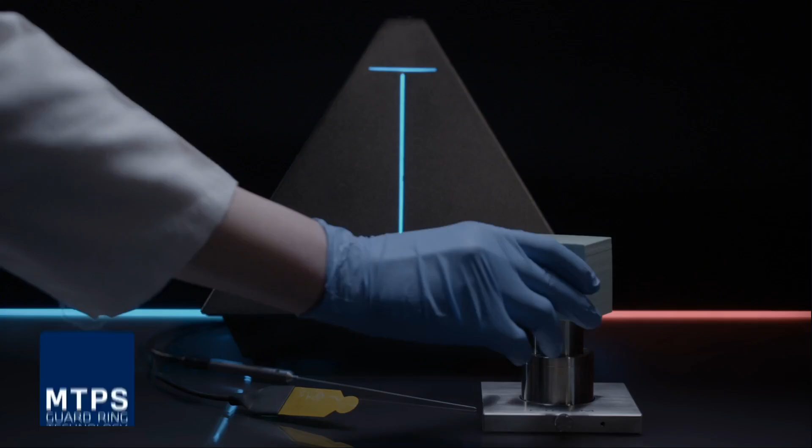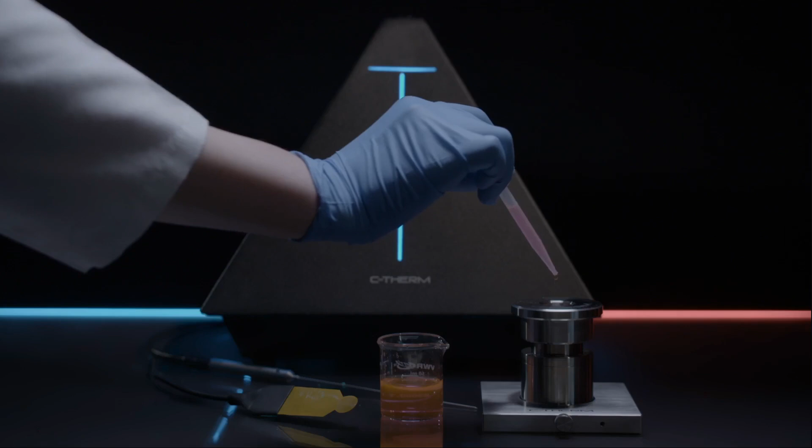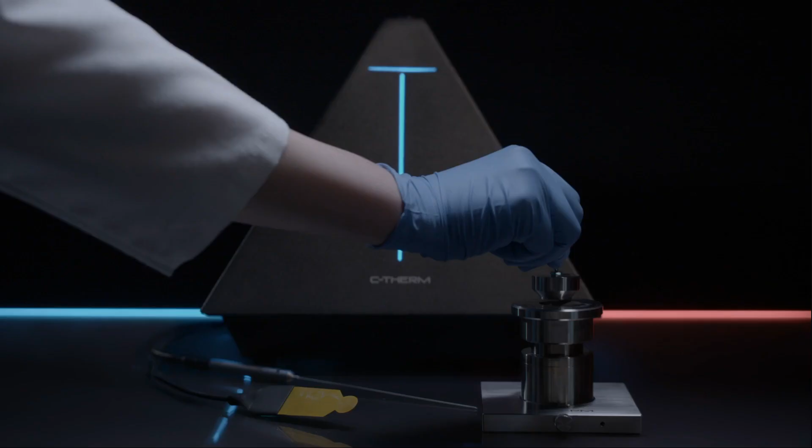The MTPS, Modified Transient Plane Source method, employs a single-sided sensor to directly measure the thermal conductivity and effusivity of materials. The method features the highest precision and sensitivity, providing accurate test results in seconds. It offers the maximum versatility for the non-destructive testing of solids, liquids, powders, and pastes. It is adaptable for high pressure, broad temperature ranges, and environmental conditions. No regression analysis is required. MTPS is the choice method for situations where reproducibility amongst multiple users matters.

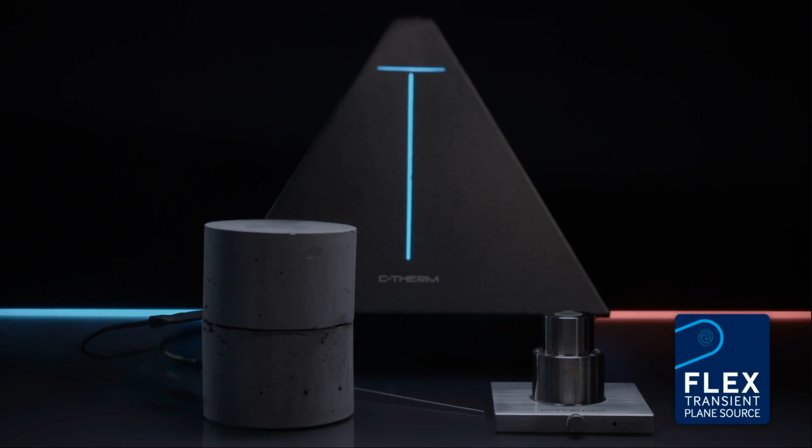With a double-sided sensor available in different sizes, the Flex TPS Transient Plane Source method provides researchers the greatest flexibility over experimental parameters, including timing and power. It is recommended for more experienced users with specialty slab, anisotropy, and thin film modules available. With no contact agent required, the hot disk-style TPS sensor is ideally suited for polymers, compacted geological samples, metals, concrete, and asphalt. Flex TPS is ideal for experienced researchers looking to push the boundaries in thermal conductivity.

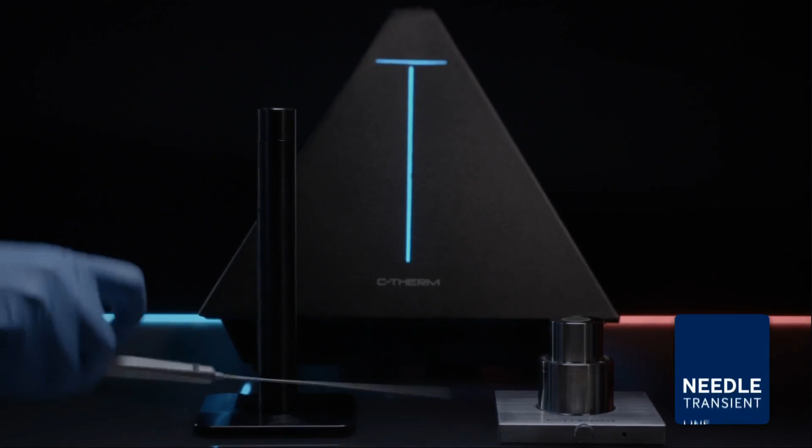Sheathed in stainless steel, the TLS, Transient Line Source Needle method, offers maximum robustness in thermal conductivity testing. TLS is best suited for granular materials, polymer melts, soils, slurries, and gels. C-Therm software provides full data acquisition and analysis in one user interface, allowing full control of all 3 methods. Intuitive, logical, easy.

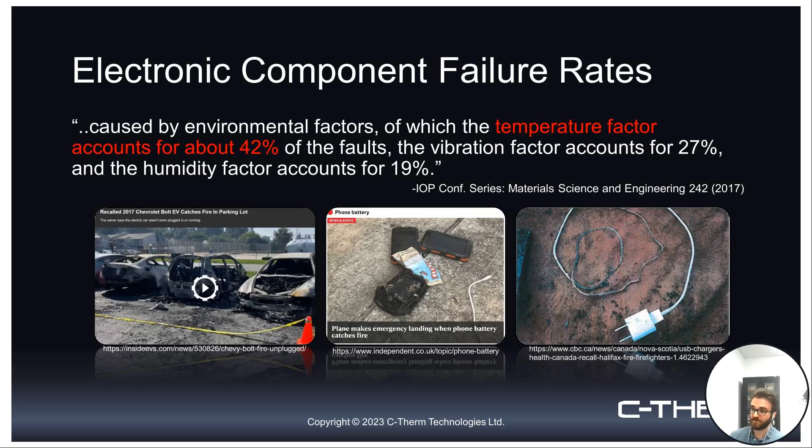A lot of the times when we're dealing with thermal management, it's related to the fact that what we want to avoid are these different component failures. A little excerpt I noted from a conference in 2017: temperature factors account for about 42% of all faults. So just shy of about half of all of these issues are coming from temperature-related components. So whether that's in an EV, in a battery, in a large-scale vehicle, smaller portable electronic devices, chargers, what have you, a lot of the times that temperature factor is a key issue that needs to be managed.

So this is all typically related to thermal runaway. Just looking to give a very high-level overview here, but thermal runaway is essentially a process that is accelerated by increased temperatures, in turn releasing thermal energy that further increases the system's temperature. And of course, if there's no way to properly dissipate or let that heat escape from the system, you get this form of an uncontrolled positive feedback loop.

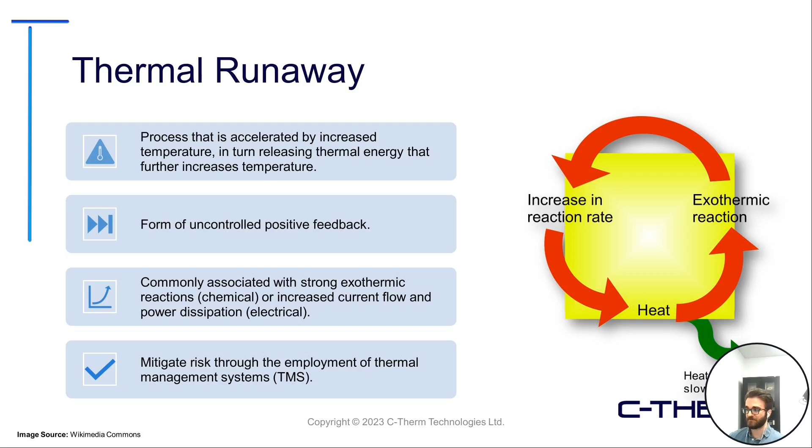When we're talking about electrical devices, these are typically noted to have increased current flow and power dissipation. And the way we mitigate these is through the use of thermal management systems. These can take various forms, how they are constructed, the different materials, what have you. But in all cases, their main goal is to help dissipate the heat from the component or from the system in question.

So today, what will be discussed is primarily around these potting compounds as a thermal management system. At a very high level, potting compounds provide not only structural and physical support to the electronic components, but from a thermal management side, they alleviate some of that temperature from these electrical components. This improves the efficiency of these devices during operation, improves the lifetime expectancy, and reduces breakdown and replacement requirements, which is all beneficial.

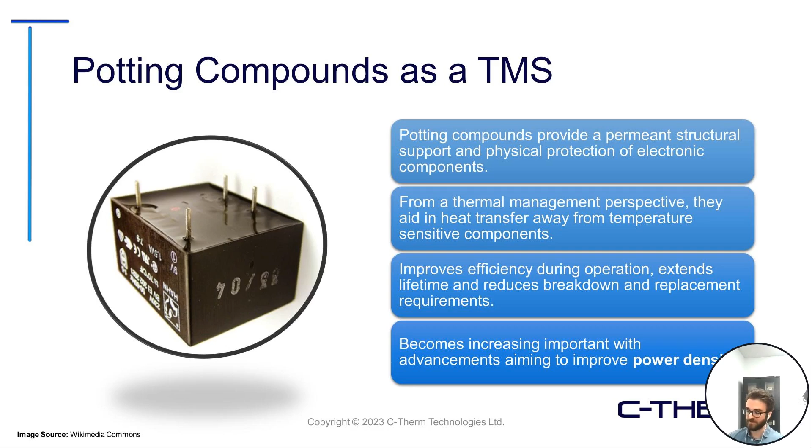And this becomes very important when the industry is looking to advance and improve things like power density in these devices, which will be touched on later in the session. But that's at the core as to why these systems are needed.

Again, just some background information on potting materials. There are different options out there. There's three of the big ones here with respect to material type, generally being epoxy, urethane, or silicone in nature. Each one of these is applicable to different scenarios. Epoxies are your hardest options. They have really good mechanical strength, offering that mid to high temperature range. Urethanes are a little bit of a balance between the two. They have good mechanical strength with some flexibility. These are typically used for your lower temperature applications, and sometimes used as a cost-effective alternative compared to some of the other available options out there.

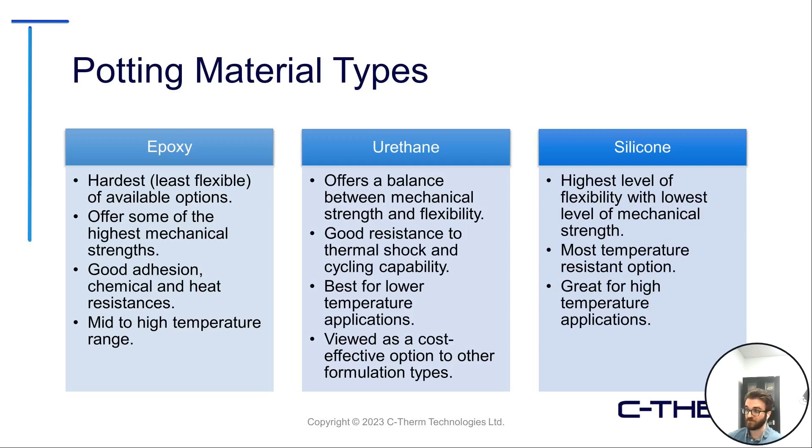And then lastly, silicone, and this one will be focused on more here today. These offer your highest level of flexibility, so really good at being able to get in and impregnate the different devices, flexible in nature, offering some of the most temperature resistance capabilities of the available options. So really great for those high temperature applications or where you're dealing with very high power output, resulting in high temperature conditions.

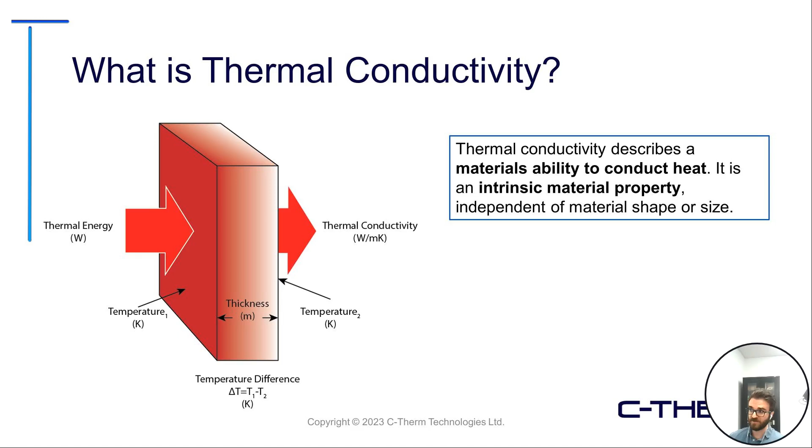Now, in all cases, what we are focusing on is the thermal performance of these materials, which really can be tied to thermal conductivity. This may be quite basic for some, but for those who are new to the topic, thermal conductivity as a property describes a material's ability to conduct heat. It is an intrinsic material property, which means it's independent of the size or the shape of the sample. And typically working in standard SI units, thermal conductivity will be described in units of watts per meter Kelvin (W/m·K).

Now, when we're talking about these materials mentioned, typically polymeric in nature, at a very basic level, when we're talking about how heat transfers within a polymer, this can, I'd say, readily be related to the organization or the crystalline structure of these polymers. So as you get more and more organized systems, what this does is it increases or improves the mean free path for phonon transfer, which is the primary mechanism for heat transfer in these materials.

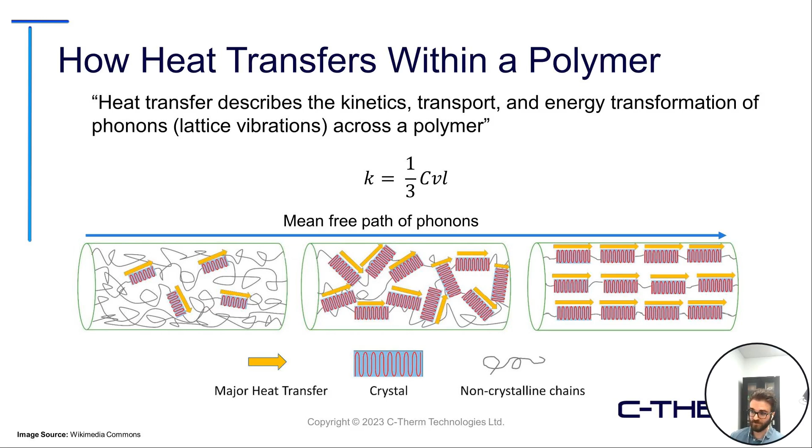And of course, related to different materials, different organizational structures of these samples, this can have an influence on the thermal performance. But where a lot of groups are focusing on is the use of fillers in their system, so these conductive fillers providing improved heat transfer efficiencies within the sample.

So this can be related to a few different aspects of the filler, whether it's simply just the loading, so how much filler you're pumping into the system. The organization and distribution of that filler within the system itself also becomes very important. And there's also been studies simply looking at the aspect ratio. So even if it's the same exact material, different structures, different forms of that filler can have an influence, some being better than others with respect to the overall heat transfer efficiencies.

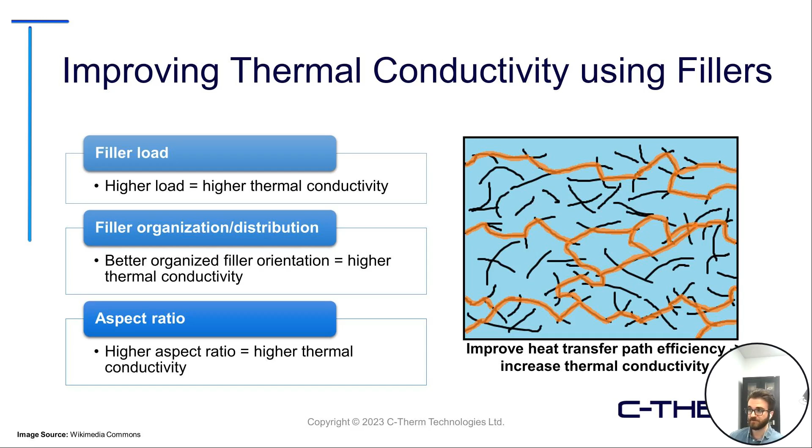Now, this brings us to the point of thermal conductivity test methods. And of course, Adam gave us the intro at the beginning where we focus on transient methods, so those would be the methods on the right there. But when we're talking about methods in general, you can really divide them into 2 main classes. So transient is the ones that we'll focus on here today, but there are also steady state methods.

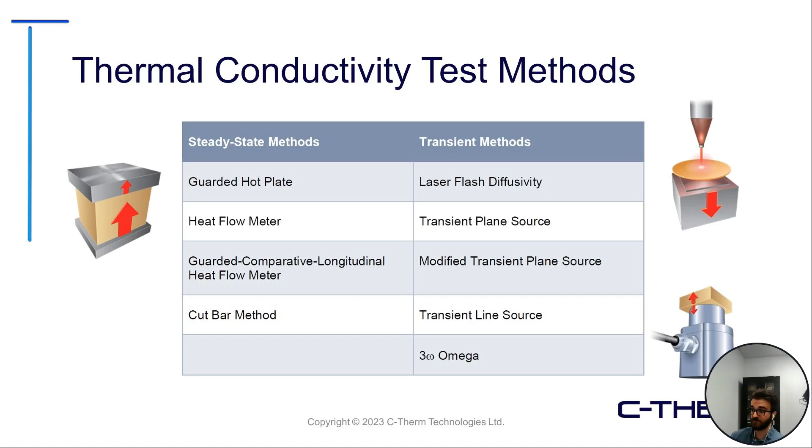Steady state, these are more traditional in nature. These are things like your heat flow meter, guarded hot plates, which of course have their advantages in some cases, but what we'll focus on here today is really demonstrating the benefit of transient options in this space, especially for these material types. And of course, this is all related to our flagship system, Trident.

Adam gave some background context to this at the beginning. But really the idea here is having 3 different methods, so different options available to you, depending on the types of samples that you're looking to test. So I'll give an introduction to some of these methods, which will queue up some of the content that will be discussed later in the session today. And primarily the focus will be the MTPS and TPS methods.

So I mentioned the different options that are available. So why transient? These are some points for which we've seen many groups gravitate towards these options. One of the biggest ones is representative test conditions, whether you're looking to test under varying temperatures, pressurization, gas environments, humidity. These sensor techniques really lend themselves quite well to being set up inside of these different environments, which can be somewhat challenging with other techniques, depending on the instrument or the method that is being looked at.

When we're comparing transient to steady state, another one of the biggest factors, when we're talking about the time and cost savings related to simply how long things can take, is that transient options will always be faster than steady state. This is simply related to inherently how the measurements work. Effectively, a transient measurement is taking a measurement of the heat change in the system as a function of time before steady state is reached.

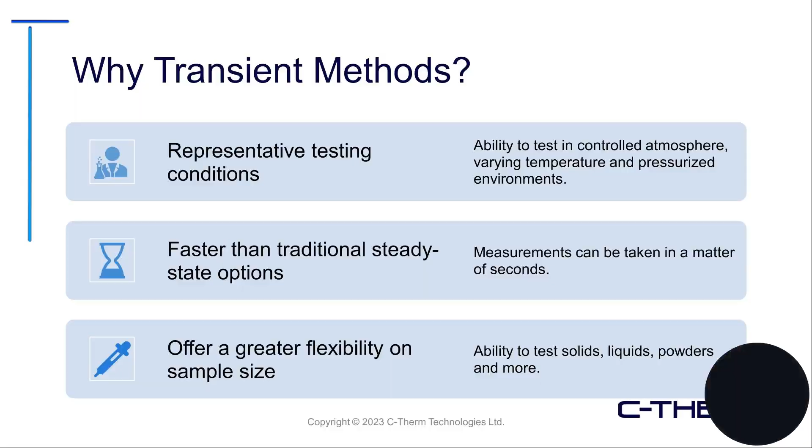So I'll start with a little bit of information on the MTPS, the modified transient plane source. This is a single-sided test method. With respect to the other options available on Trident, it will be one of the fastest methods, so typically your test times are about 1 to 3 seconds in duration. So if speed of measurement is your number one priority, then the MTPS has some really nice benefits there. It is also amongst the more versatile, so talking about the different sample types and conditions, very flexible in how it can be set up and what samples it can actually test.

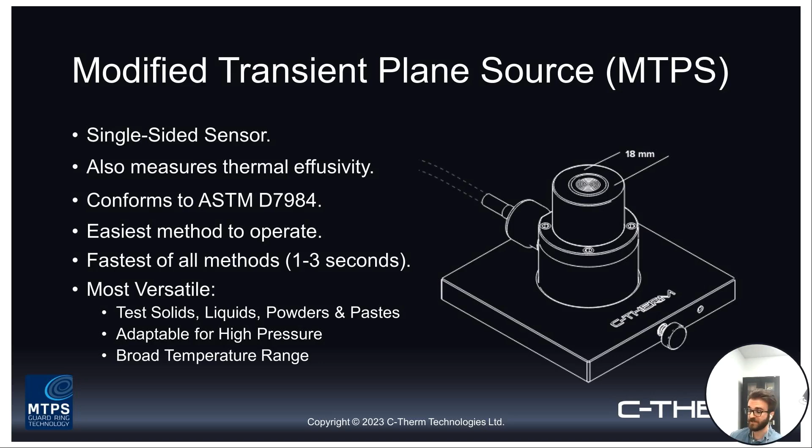But the nice thing with the MTPS is that all of the data that is collected here, even the setting up of the measurement, the test parameters, this is all handled automatically by the software based on the calibration that is selected. So with the MTPS, it is a factory calibrated technique. So one of the benefits there is that it takes a lot of the guesswork out of the setup and the analysis. This is all handled automatically for you by the software.

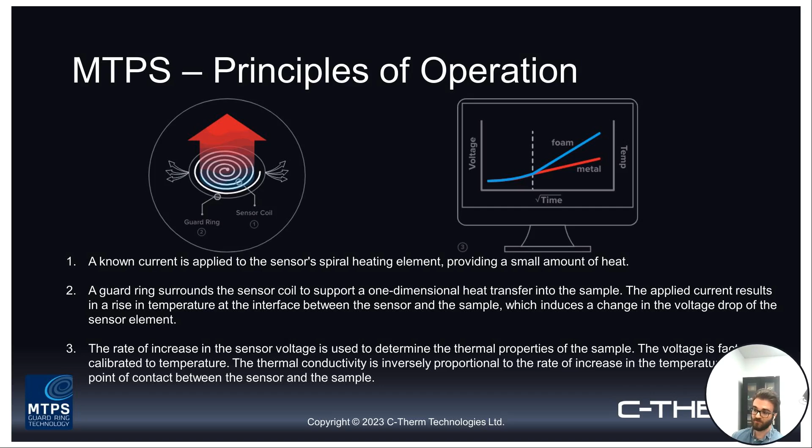One last thing I'll point out with the MTPS, it's related to the second point there, highlighting the guard ring. The guard ring, we can see that in the first image on the left there as well. Essentially, it goes around the outer area, so around the contour of the sensor itself. And effectively what it does, it helps to support a one-dimensional heat transfer into your sample. So by doing so, it prevents that lateral heat loss from occurring. And effectively what you're getting out at the end of the day is a directionally dependent measurement with the MTPS.

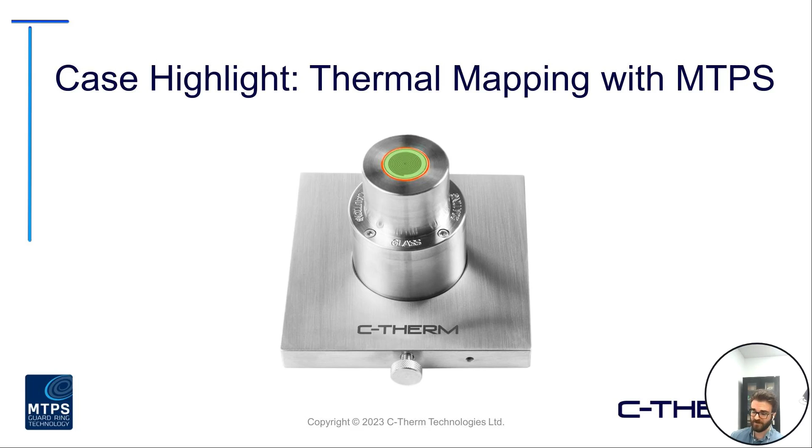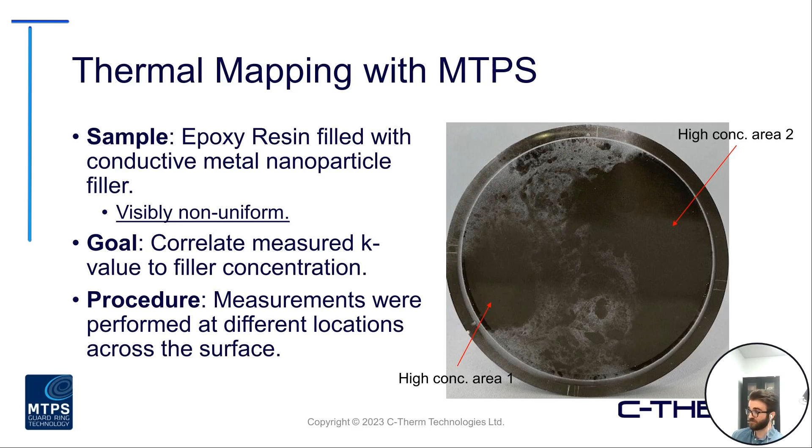This is by no means what we would describe as an ideal material, but what we'll really highlight here, and the goal of what we're looking to show, is correlating the measured conductivity value to the filler concentration at these different locations. So what we did was measurements were performed at different places across the surface of the sample. So we can kind of see a little test profile here. So basically the sensor, again, it's a single-sided method, which really is why we are able to do this type of measurement.

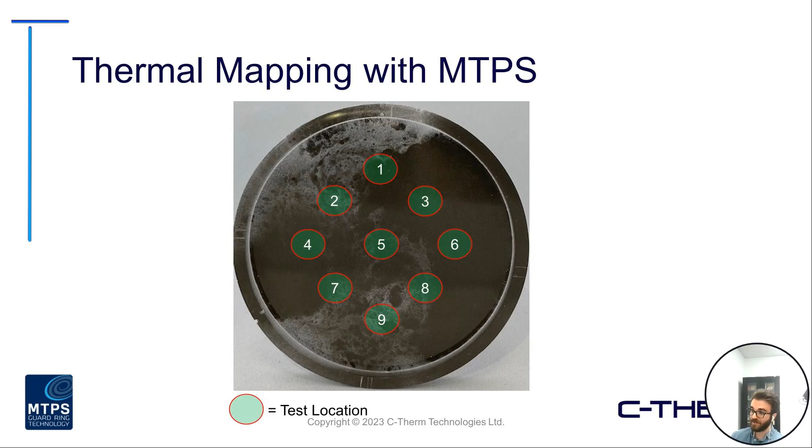So you can take that sensor, move it across the surface of the sample, and take these discrete measurements. And what we can do is at the end of that, essentially map out the thermal conductivity value. And what we showed in this sample, as we would expect, are some rather large differences at the different test locations. But this is really correlating to the filler at those individual spots. So the top left corner there, coming in about 0.347 watts per meter Kelvin, very low compared to some of the other locations. But at that spot, as we can see, there's very little filler present. It's almost closer to that of the neat polymer.

Now, if you compare that to the top right corner, we can see, of course, much more densely populated with that filler, and the conductivity results coming in almost 3 times higher. So effectively here, what the sensor can do is give you an understanding of, are you getting very uniform spreading, very consistent results across the surface of material, or are we getting something like we're showing here in this case, which are very large differences, which is, of course, what we want to avoid, as these can result in hot spot buildups, just poor performance at the end of the day with the sample in question.

And again, with this material, as I mentioned, very visibly detectable. But in the case where your sample may be opaque in nature, or you're not visibly able to detect those issues, well, then the MTPS can come in and really do that type of checking for you.

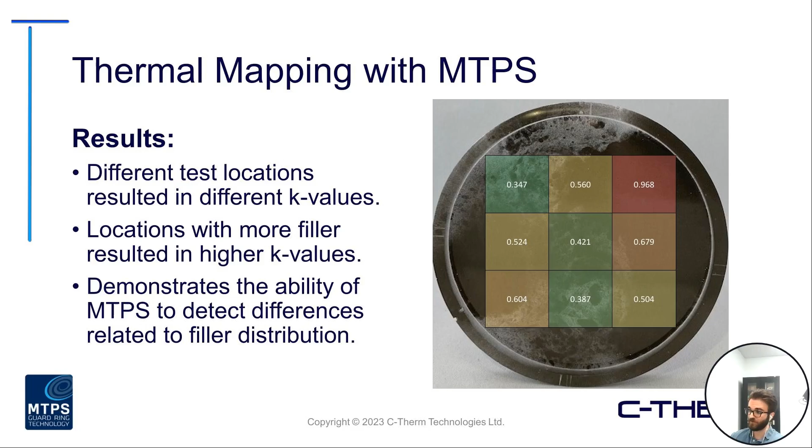So I'll pivot here into the TPS, and this is going to be the method that will be more focused in the following portion of our webinar here today. So the Flex TPS, it is a double-sided sensor, so a little bit different, of course, in construction and design than the MTPS. One of the benefits I'll highlight with the TPS is it does not require a contact agent.

Some materials with the MTPS may require the use of a contact agent between the sample and the sensor. This isn't required for all samples, but in some cases it is needed. And certain materials, whether they be hygroscopic in nature, just simply react or absorb with these different contact agents, the TPS benefits from just completely removing that from the equation. So these are done to handle contact resistance.

And anytime you have a contact-based measurement for thermal conductivity, contact resistance plays a role. And we have to have a way of overcoming that. And with the TPS, it is handled a little bit differently. One of the benefits is no contact agent is needed. There's also those specialty utilities available for TPS, which I'll describe a little bit. So there's slab, anisotropy, and thin film utilities available.

The TPS inherently is a little bit more of an advanced method to operate from a user perspective, I would say complexity-wise. There's a few more things that need to be taken into account during the setup and then also during the data analysis. But of course, one of the main benefits of the TPS is conforming to the ISO standard. So for folks looking to conform to a specific method standard, ISO 22007-2 is what the TPS will conform to.

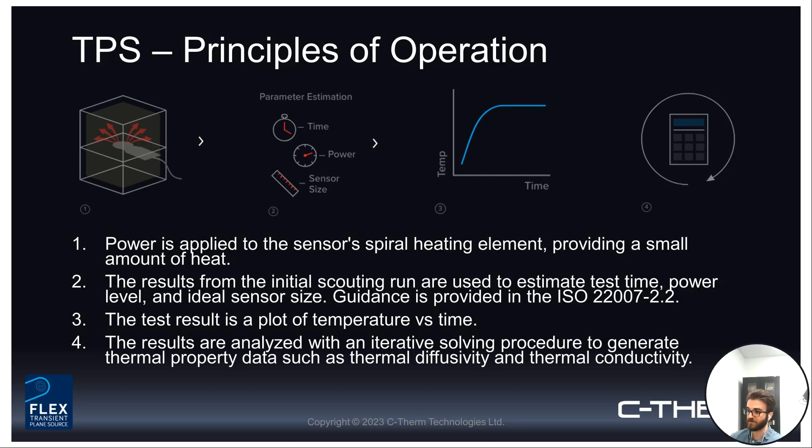Now, with the TPS, there's these different utilities in which you can operate the sensor. So the bulk utility is really your most simplistic form of TPS testing. It's geared towards isotropic samples. Just to give you an idea on your size requirements here, the diameter of your test material will scale 2.5x the diameter of the sensor that is chosen, with the thickness of your sample scaling 1x the diameter of the sensor. So there's a 6, 13, and 30 millimeter size option available on Trident. And with that understanding, the larger the sensor, the larger the sample that is needed.

Now, where many groups will gravitate towards the TPS is for some of these more advanced utilities. Again, really just running through these at a high level here. The slab utility is a great option for testing thinner, higher conductivity sheets or slabs of material that may otherwise not fit the bulk size requirements. Each one of these advanced utilities carries a little bit of a different setup requirement or some different inputs compared to the base functionality, but they open up some different benefits depending on the samples in question.

The anisotropic utility, of course, straight in the name, provides a measurement of both the in-plane and through-plane direction within a material. And then lastly, the thin films utility is really geared towards freestanding polymer films down into the micron range. So if you have very, very thin samples, the TPS thin films utility may be a good option there.

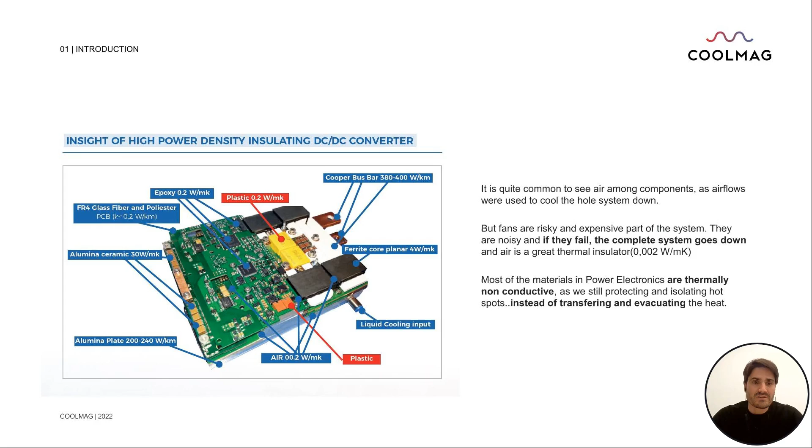And the third thing we found is that, maybe the situation is changing, but most of the time the cooling methods you're using are on a plane, in two dimensions: cold plates, liquid cooling, and all that. So there's a huge volume that we're not taking advantage of. After investigation, temperature has a big impact on reliability and the life of the final devices. There's a rule that every 10 degrees affects the final performance in a bad way.

So this is what we found after this first contact with your industry. There is a lot of air and plastics within power electronics. Most of the time, we're trying to protect from the heat instead of moving it, instead of taking the heat out of the device from the hot spot to the cold spot, and that's crucial.

We're talking about thermal conductivity most of the time, but no one is talking about thermal diffusivity. That's something we found in the very beginning, in the early days when we tried to understand everything. Thermal diffusivity is more related to fastness, so to how fast your material is able to move heat from the hot spot to the cold spot, and it's also crucial to the final performance. So it's not only good to have a good thermal conductivity value, but also a very high thermal diffusivity, and it's related to the chemical thing, to specific heat and density.

3D, so three dimensions, and we're not cooling down power electronics in a whole volume. We're just cooling on a plane, so in two dimensions. And this is one specific topic that's related to the batteries. Most battery packs are not well designed, in that there is a lot of empty space inside between the cells.

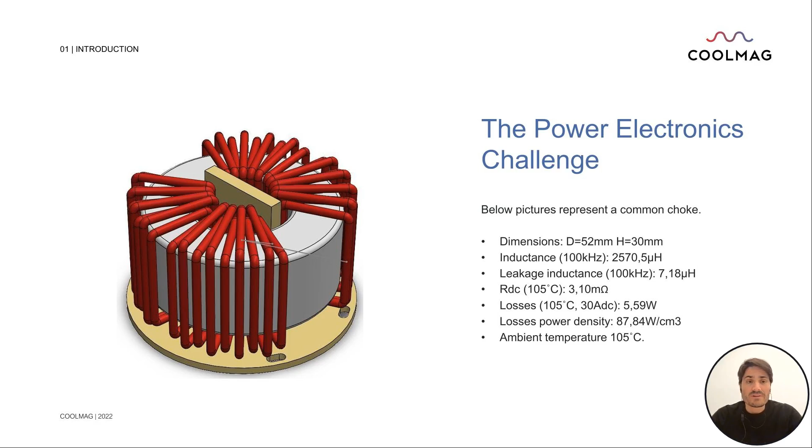Once upon a time, this is how everything started. Like I said, it was three or four years ago. We've been dealing with chemicals for the last 25 years, resins, fillers, all the things. And one day we got a challenge from a power electronics customer. These guys had a serious problem with the choke. The temperature was up to 180 degrees, really high.

They had been testing different chemistries like epoxies and PUs. And because of the temperature, the ferrites were broken because the materials were so rigid. The final temperature was really, really high. The aim was to decrease the size of the choke and improve the thermal management. So that was the challenge: guys, you know about these things, try to find something to help me in the thermal management.

But we got some requirements that are in fact still working today. Every time we launch a new product, because we are only three years old but we have a portfolio, we try to keep these requirements working. It's something we can change, we will talk about this topic later, and we can do a lot of tailor-made solutions. But at the end, we try to fulfill all the things.

The first thing is that we're always looking for the highest thermal conductivity and thermal diffusivity values, depending on the final application. Sometimes it's not necessary to have 3 watts, and it's okay with 1 watt. But we're always trying to increase it, keeping the electrical properties okay, electrical isolation. We're talking about an electric strength between 10 and 15 kilovolts per millimeter. This is a standard value for us.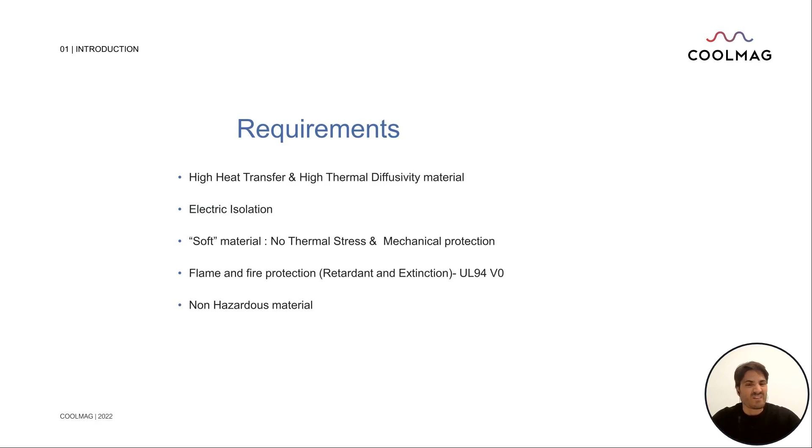Okay. So finally, we made it. We tried a lot. We tested different things, different materials, and we launched 3 years ago. We launched Coolmag 29. It was the very first product that right now is changing a little bit. So we were able to decrease the temperature in this scenario, in this case, like 80 degrees. It was crazy. It was very, very good because of different things.

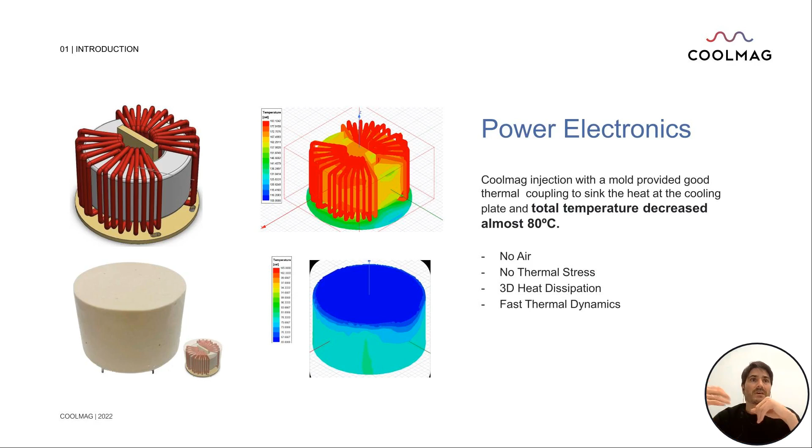So first of all, there was no air inside the choke, no thermal stress because of the silicone. The dissipation was in 3 dimensions, and the fast thermal dynamics. So our Coolmag will have very good thermal diffusivity values, and that's why the final performance or the final temperature.

Because finally, when we talk about thermal management, you think about temperature. So what would be my equilibrium temperature once my choke, or once my OBC, my onboard charger, is working in working conditions? Okay, and this is not only related to the thermal compound performance, because this is what we found. There are three different key things to get the best thermal performance or lowest stabilization temperature.

First of all, it's the thermal diffusivity and conductivity value. That's for sure. The higher the better. Okay. Second one, like I said, the potting nature. So sometimes in the same conditions, even with a lower thermal conductivity value, you change and you put a soft thing like a silicone, and your final temperature drops down a lot. I mean, 30, 40, 50 degrees. So it's crazy. And the third thing is very, very important.

It's funny because I think that Adam in the previous presentation said that you can have a good method but a bad application, and it's exactly the same for us. So this is what we found, that you can have the best thermal compound, a good Coolmag 29 LV, for example, that's our standard. It's a silicone, everything's okay, but you apply it the wrong way. You don't make it right. There are bubbles, there is empty space. It's not going to perform. In fact, the final performance can be very, very bad, only because of the application.

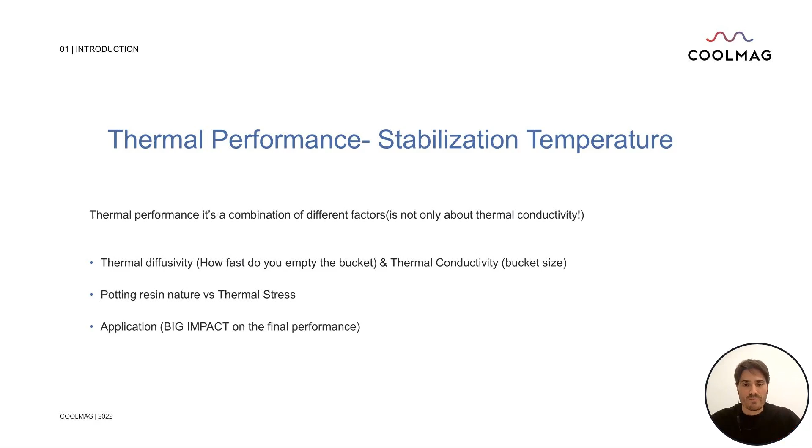So I think it's good to have a look at each application, each case, and we can support with it. We will go through this later. My colleague Moises will talk about this topic, but we can help them. So we're not only providing potting resins, but also some support. Okay. And this is Coolmag. So I think Moises, my colleague, is going to go through this part of the presentation after all this first technical part. Moises,

I think your mic is not working. Your microphone, not yet. Don't think so. Let me check. Not yet. Maybe in the chat you can confirm if you can hear it, because I'm not hearing anything at the moment. No, we don't have the audio. Oh, okay. Moises, just check on the upper right. There's a toggle on the start video and also the mute for the microphone. There's a little arrow down that can help you select the microphone. Yeah, exactly. You had a headset on earlier too. I'm wondering if maybe it was set to the mic on the headset. Let's check. No. Not really. Well, don't worry. I can do it. Okay, Moises, we'll try to fix it. All right. Okay, don't worry. I will go through this.

So after all this investigation, after this first product launch, we found that we got something interesting, something that is working very well. So we decided to create a company, in fact. We're part of a group. Sometimes we say that we are kind of a startup. In fact, we are kind of a spin-off.

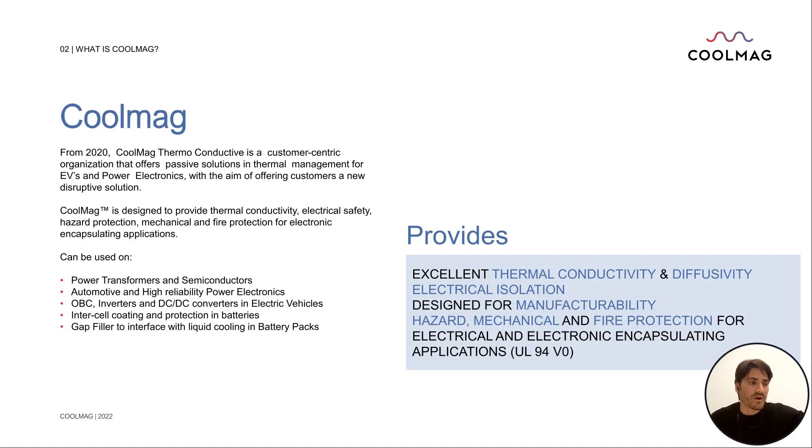So in the industry where we are, I mean, we are everywhere. So in terms of, I go through the products. Wherever there is a thermal problem, we can help. So we're not talking only about the electric vehicle industry, the EV industry, but also two wheels, power electronics, so in general, tier 1, tier 2, industry, consumer electronics, all of that.

Okay, these are our Coolmag solutions at the moment because the family is growing almost every week. In fact, Coolmag SA30 and Coolmagplast are quite new products from a couple of weeks ago. So we are focused on silicones at the moment. So we go from 1 watt to 3 watts. Coolmag SA10 is a 1 watt product. Coolmag SA30 is 3 watts, and we are trying to increase it without compromising the other properties.

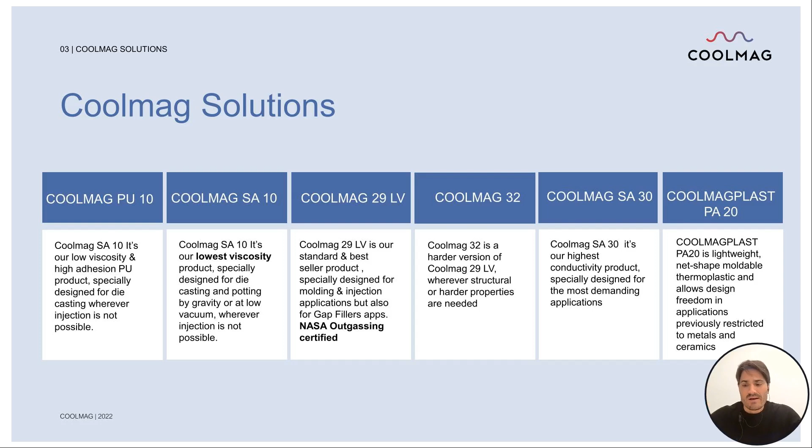We have also a PU resin. We don't like to use it too much because we are not experts, and these are different chemistry, a different world. But we have some formulations because some of the customers are looking for adhesive properties, or are looking for an adhesive, in fact. So we can add some fillers to get relatively high thermal conductivity. Because sometimes you need these additional properties, but we are focused on silicone based.

They are all 2K, so you mix one by one. You can use room temperature curing, or you can increase the temperature. You can go to 40, 50, 60, 100 degrees, and the final curing time will be decreased. And the Coolmagplast range is a different family. We can talk a few words about this.

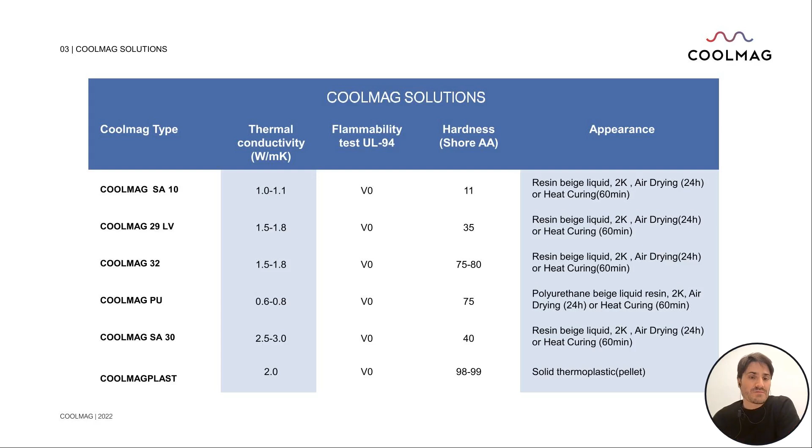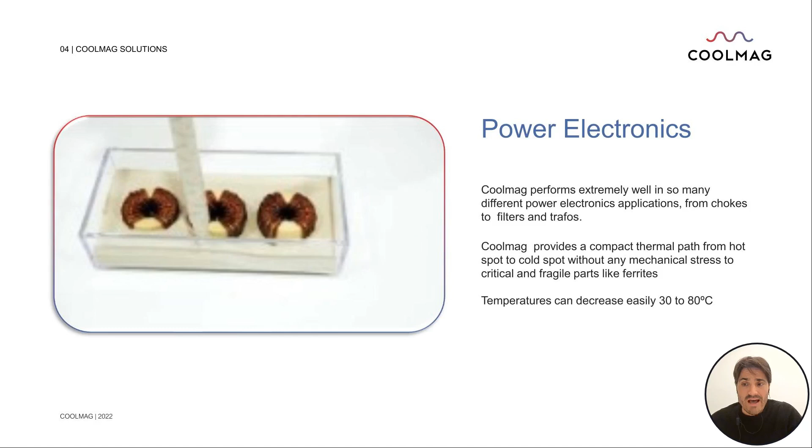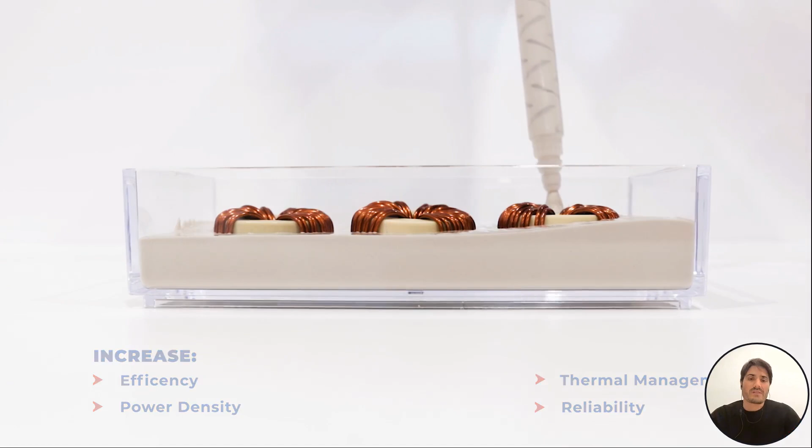Power electronics transformers and chokes for onboard chargers, OBC, in electrical vehicles are required to perform very high power management for very short periods of time with very high power densities. You can apply Coolmag on the final device, OBC or whatever it is. So it's very easy: increase efficiency, power, thermal management, and reliability. Or even gravity or casting. So there are different methods to reduce total losses, volume, and cost.

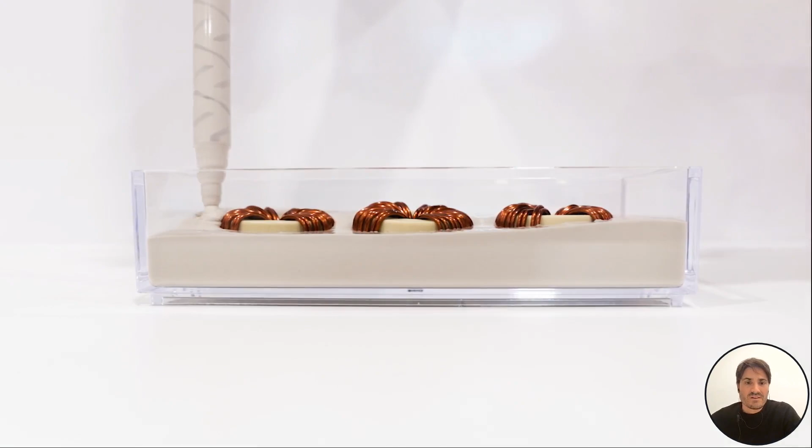As I say, we can support you. We can give you some advice because we have a very good background. Our solution is Coolmag 29 LV. Low viscosity for flowability, thermal conductivity to remove heat, low stress, and mechanical. But it's always good to have a look into it, and for sure you want to test it. We'll talk about this later, but you can try.

We can increase the viscosity to 100,000, something like that. So you can use it even as a gap filler. And in terms of battery protection, Coolmag works very well as a gap filler and even as a potting resin. So this is something interesting. I will go through this because I think that it's very funny.

So it's quite new. This is the new Tesla battery pack. And as you can see, if you go to the Munro YouTube channel, I really highly recommend you to have a look into this, guys. Tesla changed completely the strategy. So right now they're injecting the whole battery pack with a potting resin because it protects from the thermal runaway in a very good way.

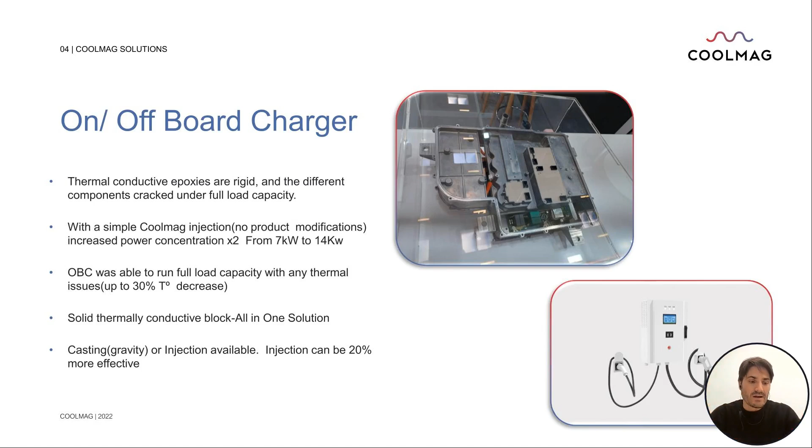And also our Coolmag 29 LV, it's outgassing NASA certificated. So it has a NASA certification for the outgassing, and it's not very common for silicone. So there's no gas, especially in things that are completely sealed. You cannot use convection, so it works extremely well.

And then inductive charging is also quite new, and it's performing. In fact, inductive charging probably is going to be the future in terms of charging vehicles. And I mean, it's the same problem. You have a coil, a bobbin, and it gets really, really hot. So what we do is we can do both. You can inject Coolmag, or you can just pour it over the copper coil, and it performs very well. We have a few customers making this kind of applications.

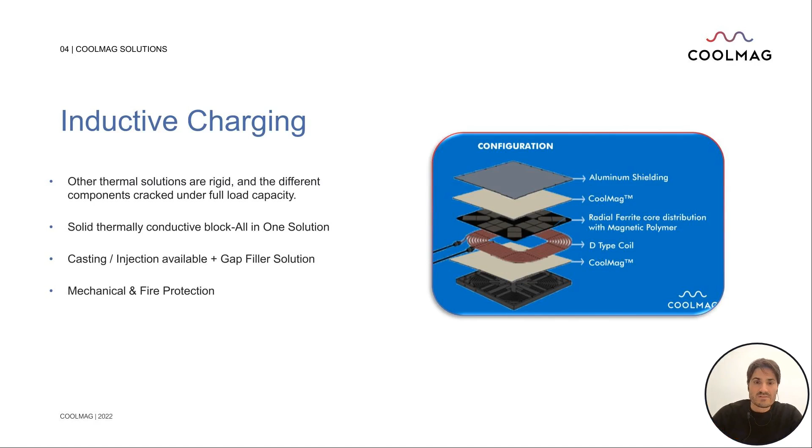And this is Coolmag Plus, like I said, this is a different thing. So it's a pellet. So you need to inject it. Some of the big customers are making their own injection, but most of them are using some kind of transformer or injectors. So this is how it works. In terms of thermal properties, we're talking about 3 watts per meter kelvin. So it's relatively high.

And you can do whatever you want. You can do battery packs. You can do coil bobbins. You can do whatever you want. It's a polyamide at the moment. We chose polyamide because the first certification that we have is for polyamide polymer, but probably we will try to find different chemistries.

Okay, and this is the last part of the presentation, the Coolmag as a service. Like I said, we're not only making or selling potting resins, because we found that there's not too much, let me say, potting culture, especially for the electric vehicle. So the customers are not feeling comfortable with chemicals, and especially with potting resins. And like I said, the application makes the difference. The way you apply the final product can make the difference.

So we decided to create the Coolmag as a service. It's quite simple. We're not only providing you the potting material, but also we can do some prototyping for you, the first injection or applications. So we got battery packs, OBCs, chokes, whatever it is. We can sign an NDA if it's necessary. And we do the first application, the first injection for free. We put some thermocouples, and we send it back to the customer to test. And once it's approved, you can do your own.

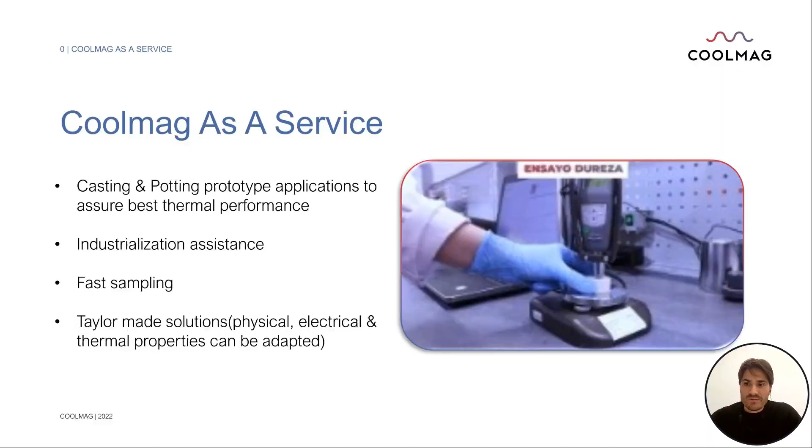And that's it. I think we have also a video just to have a look into it and to check how we do it. And this is going to be the last video of my presentation. So this is going to be the outro. There we go. I hope it's okay.

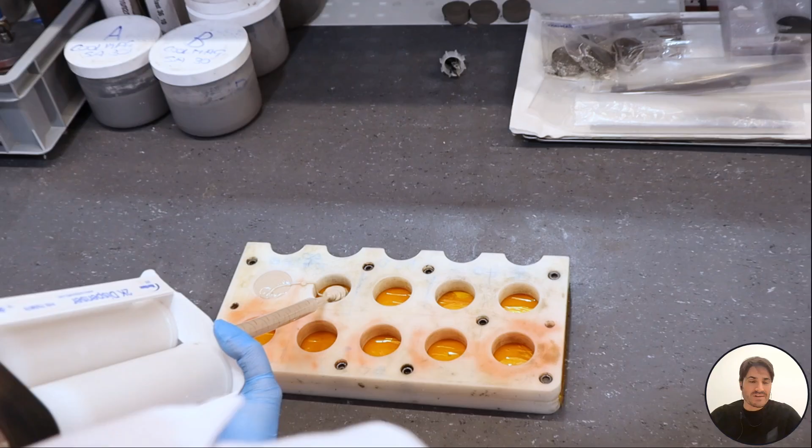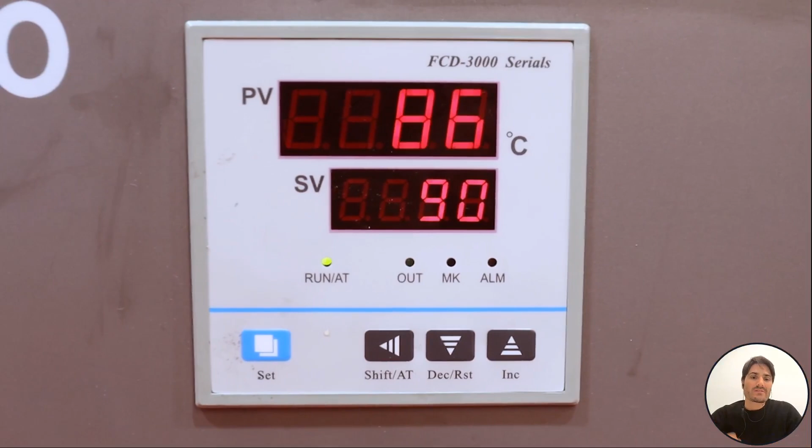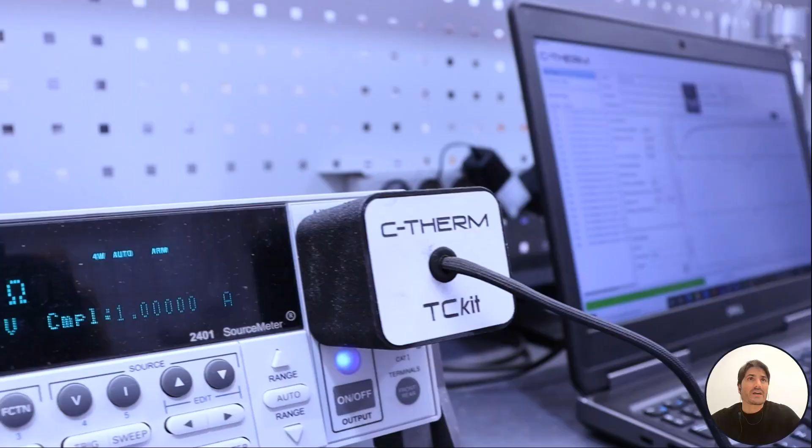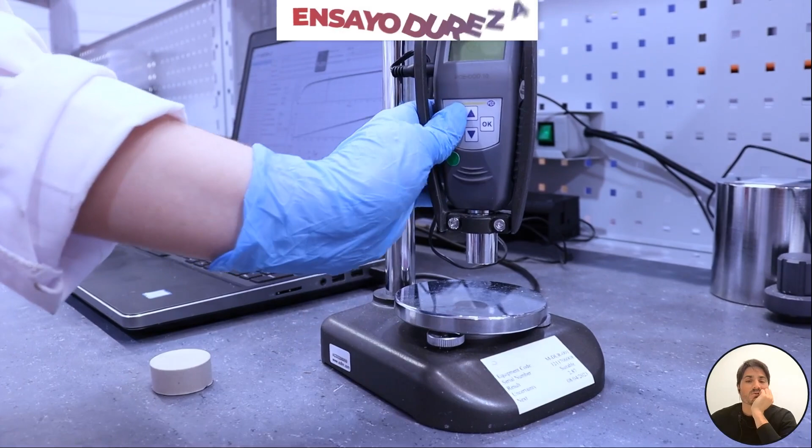How is it working? Yes. Okay, great.

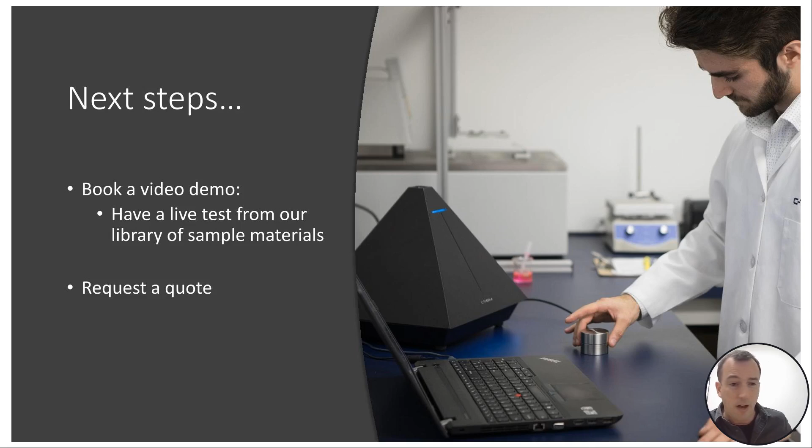So at this point, I want to thank our presenters, Javier, Moses, and Aria. An excellent job curating today's discussion. We covered a lot of ground in looking at different thermal compounds and heat management in power electronics and batteries. This has huge implications for EVs, of course, which is a very hot area.